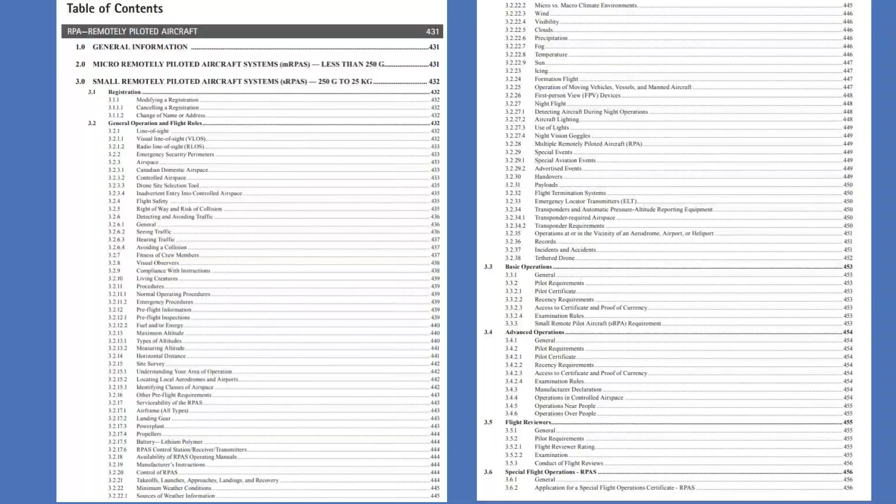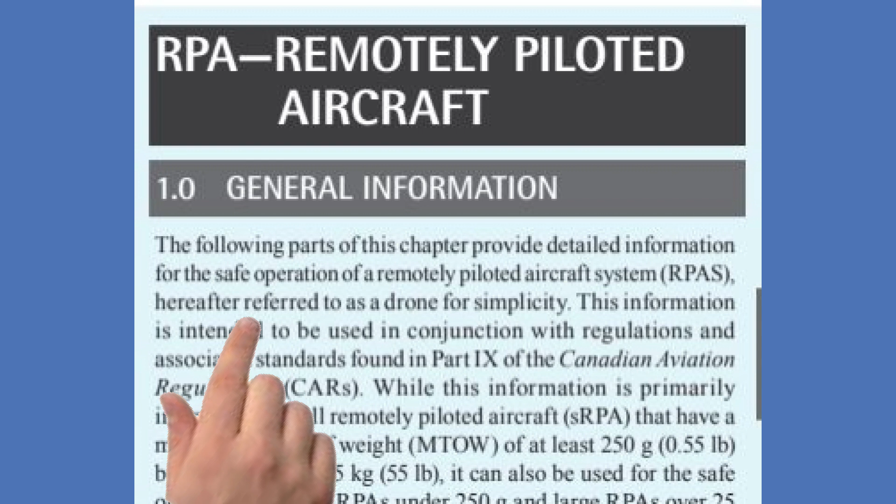That said, it does start out a little funny because the first sentence describes the official term as RPAS, but that's okay, we're going to call them drones from now on, and then it calls them RPASs pretty much the rest of the way through the document.

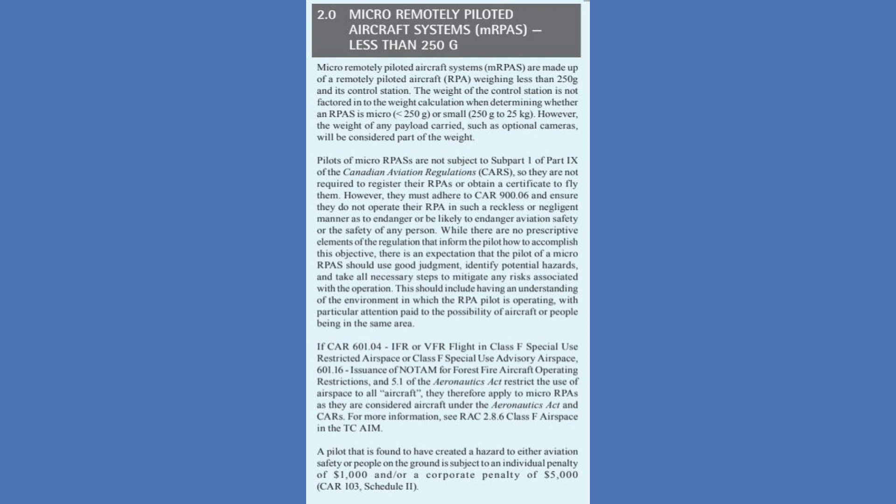The document has a really good section on sub 250 gram drones, such as the Mavic Mini, and it confirms what I said in my video earlier about the Mavic Mini, that the only regulation, the Part 9 regulation that applies, is the 900.06. However, it does go on to clarify that things like Class F restricted airspace still apply to the Mavic Mini. So no, you can't fly it at Niagara Falls. You cannot fly it at the Parliament buildings, for example, or any of the other 50-odd restricted Class F zones in Canada.

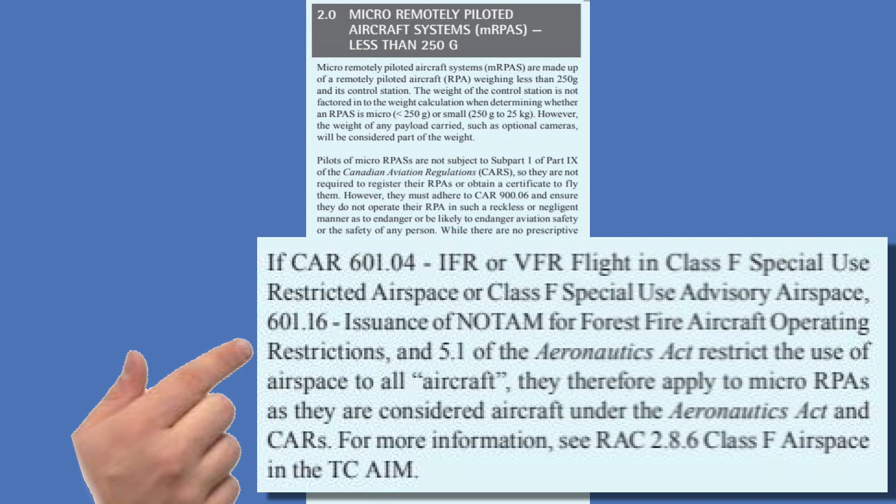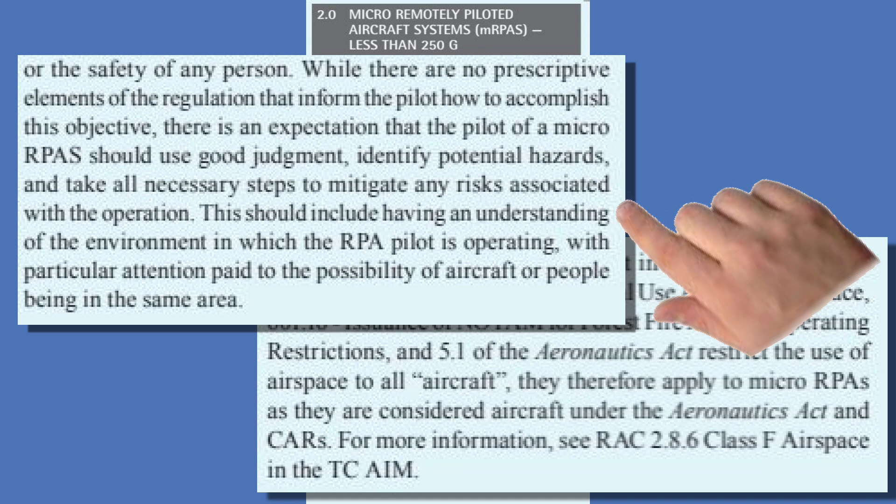It also has some practical advice in terms of how to interpret that 900.06 regulation, the so-called don't be stupid rule. Basically it says there's no prescriptive elements of the regulation. In other words, it doesn't come out and tell you exactly what you can and cannot do, but you should use good judgment, you need to identify potential hazards, and you need to take all the necessary steps to mitigate any risks associated with the flight. And that includes understanding the environment where the pilot is operating to make sure you're not going to run into aircraft or people in the same area. Really good advice.

Another great thing about this document is that when it starts to talk about controlled airspace and the restrictions around flying a drone in such airspace, it describes what these different classes of airspace are. So you don't have to go digging through 300 documents trying to figure all this stuff out. Well, of course you could watch my videos, but here it is in a document in one succinct place describing all of these airspaces. Generally speaking, it doesn't get into too much detail, but it's great that they have this in one spot.

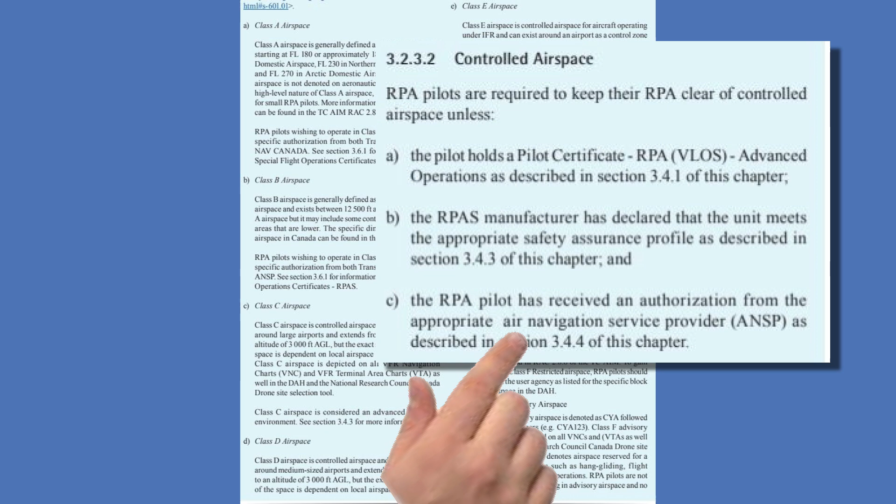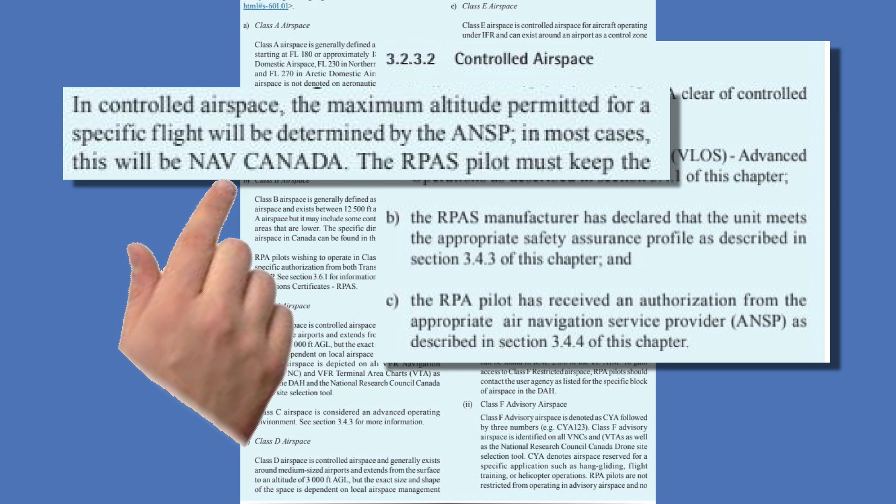Now, one curiosity is that in this controlled airspace discussion, they introduce a new term, a new acronym, ANSP, which stands for Air Navigation Service Provider. And they just casually mention later on in the document that what they really mean is most of the time Nav Canada, which is the natural interpretation of that. But it's strange that they've introduced a new acronym for Nav Canada, but still talk about Nav Canada.

They also have a pretty hefty section, I think it's 3 pages, talking about human factors issues, which is good. All this stuff is covered in my human factors study guide video. But again, here it is in black and white, and it talks about the limitations of your eye and vision, and the effect of dark, visual scanning techniques you should follow, of course the fitness to fly thing, and alcohol.

I did have to laugh though, because they included this I'M SAFE checklist in here, and when I did my human factors video, I found this checklist as well, but it has an error in it, and they didn't fix it. I did, but they didn't. If you answer any of the questions below as yes, you're likely not fit to act as a crew member. And it says, are you suffering from any illness? Yes, well then don't fly. Are you under stress? Yes, you don't fly.

Fatigue, have you had sufficient rest in the previous 24 hours? Yes. Oh wait, that means you shouldn't fly if you've had enough rest. Eating and drinking. Have you had sufficient and proper nutrition? The answer is yes, you shouldn't fly. You should only fly if you're tired and hungry, according to these last two. Oh well, nobody's perfect.

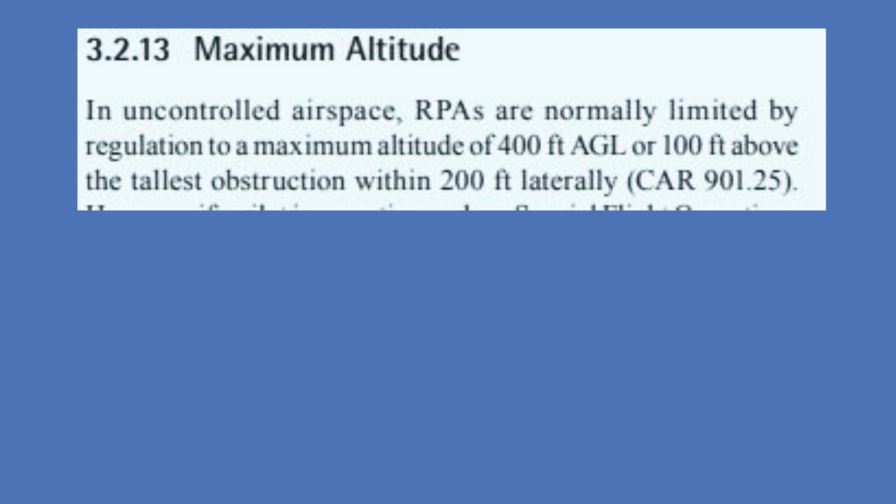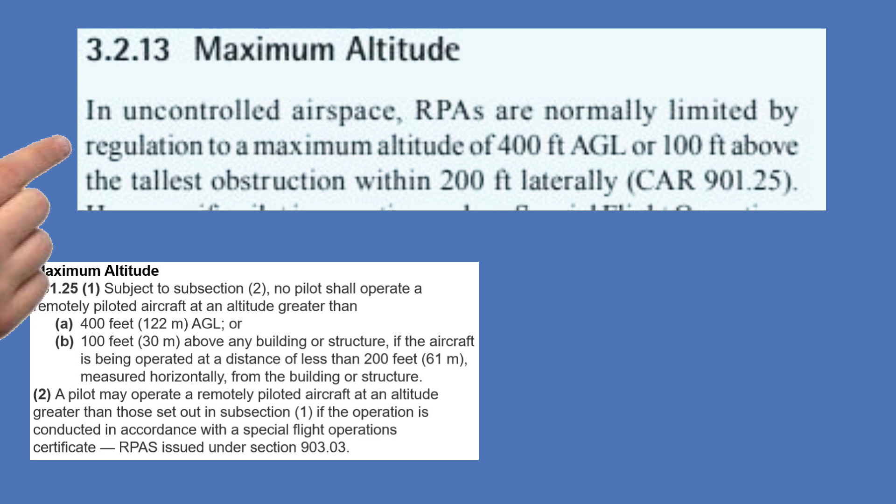So I'm not going to drain this entire document, but two other things I wanted to point out. They did make an attempt to clarify the maximum altitude rule, 901.25. This is absolutely atrociously worded in the regulations. They've tried to fix it up a bit. I don't think they've quite got there, but it's close. RPAS are normally limited by the regulation to a maximum altitude of 400 feet AGL or 100 feet above the tallest obstruction within 200 feet laterally. So a little more clear. I think they could have still done better, but there you go.

The last section I wanted to point out is some clarity they've provided around advertised events. And I think this clarity is really good and really important and pretty clear, actually. So what they say is that unless you have an SFOC, you need to stay 100 feet away from the boundaries of the advertised event. And they clarify that the boundaries are the demarcation, like fences or gates or whatever like that. Or if the area is immense, like a fishing derby or sailing event, it's 100 feet away from people who are participating in the advertised event. These are some good clarifying guidelines.

So there you have it, some tidbits from the March 26th, 2020 update of the Aeronautical Information Manual, and in particular the brand new chapter on remotely piloted aircraft.